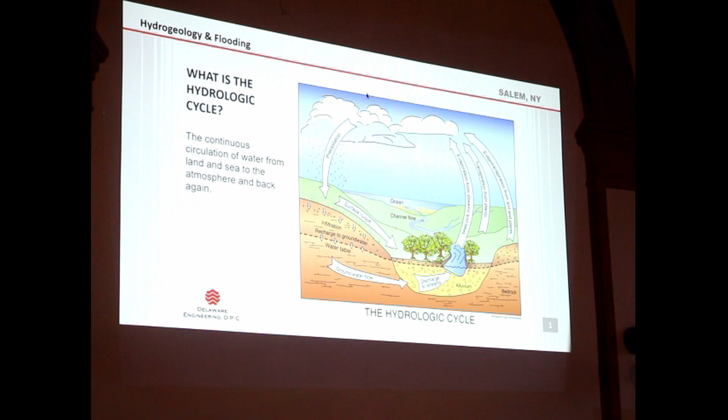So here's the hydrologic cycle. I'm going to check out the new, wow, that's really cool. So we can say that water starts up here in the clouds. It's not even going to talk about how it gets there. That's a whole other story.

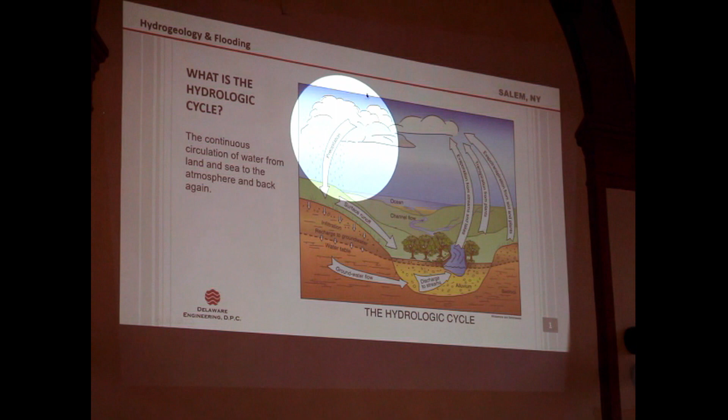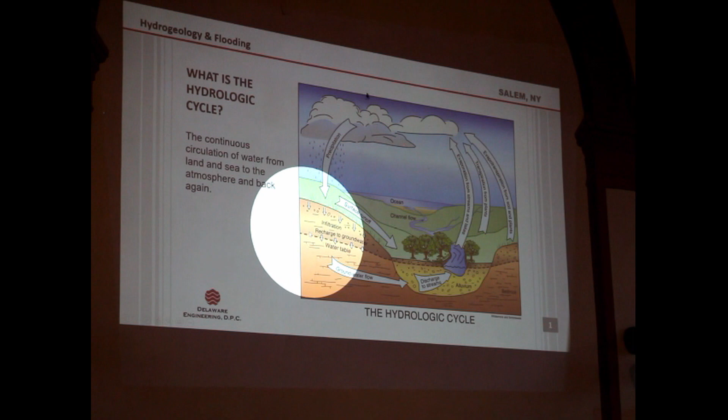Let's say we're starting from there, and water rains on the ground. When it gets to the ground, it has a whole bunch of options. Depending on the slope and what kind of surface that is, it can run over that surface, or it can infiltrate into the ground. If it infiltrates, it'll hit those areas of soil that are dry, and infiltrate through.

It might be bedrock, it might be soil, and eventually that water keeps going downhill, underground. It'll hit that area that's saturated, that we call the water table. And that water table level changes in every area depending on the weather, the climate, and what's been going on.

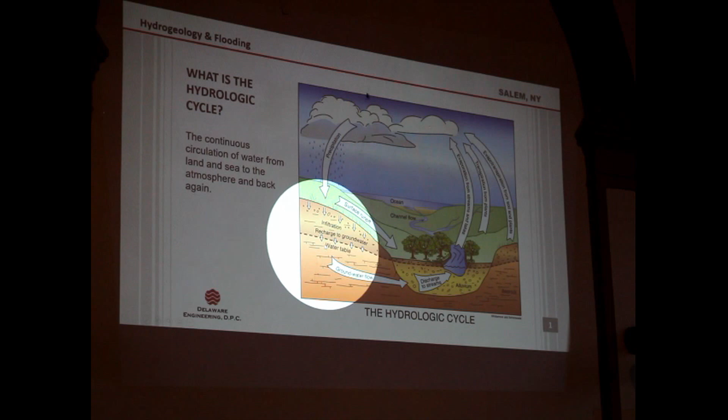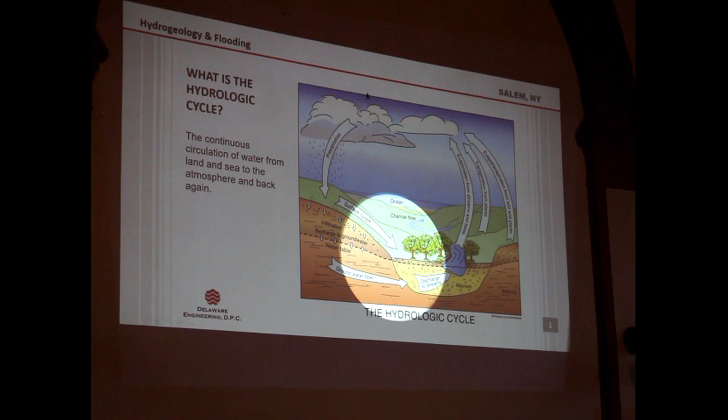Groundwater also flows downhill, and we're going to assume that this hill is a lot bigger than it is on the picture screen here. So that groundwater will flow downhill until it meets this area down here, where there's a channel of the river, or the stream, or the creek, or whatever you want to call it. That groundwater table intersects that creek bed, and groundwater will feed into that creek bed. Then the water continues to flow downhill as it goes.

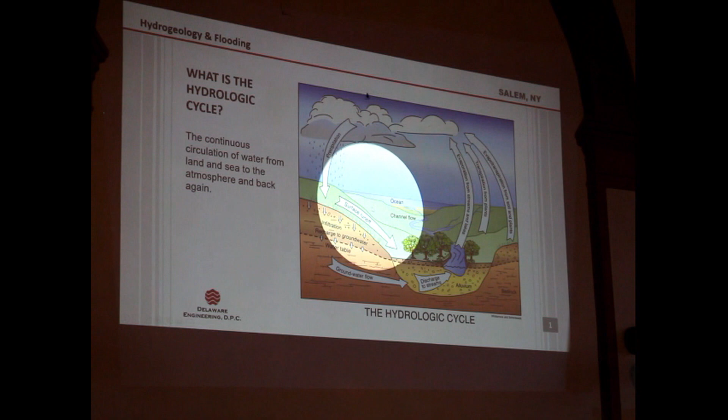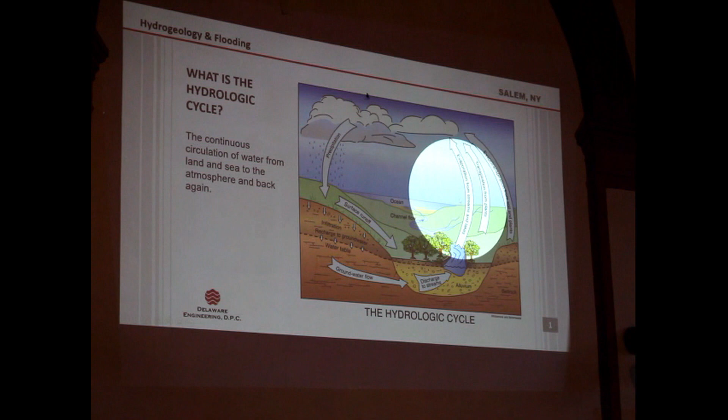Now, if that water hits the surface of the land, it depends on the soil, how fast it will infiltrate, if there's pavement, if there's bedrock, if there's a steeper grade, more of it will run off and directly downhill into the forested area, into the flatter area, until it also hits the stream, and the stream goes downhill to the ocean. Otherwise, trees can transpire the water that they pull up, vegetation can transpire the water that it pulls up, and it goes back into the atmosphere, or it winds its way all the way down into the ocean, where it also evaporates and heads up back here.

Now, people pull that water out for their drinking use and for other uses, and that, as part of a wastewater treatment plant or a septic field, also rejoins the cycle.

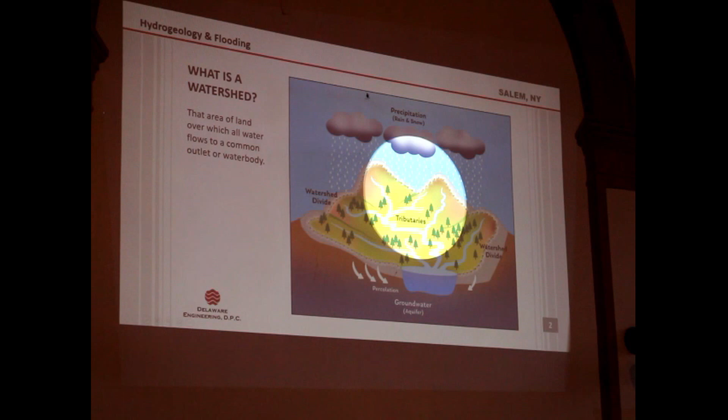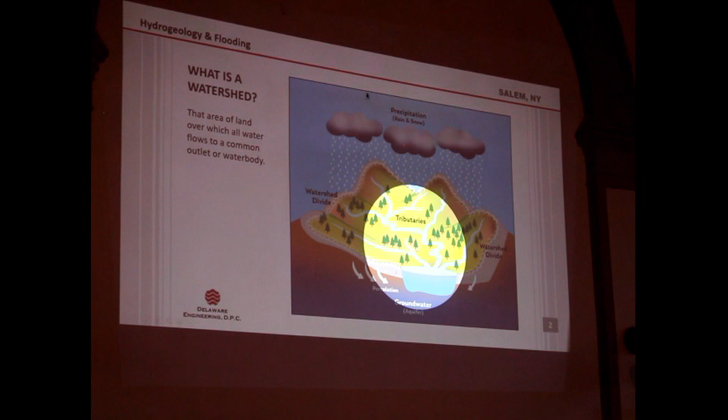All of this rain that's falling here is hitting that top peak of the mountain, and water on this side of the hill flows down this way, and water on this side of the peak flows down that way. All of that water that flows into these common tributaries that gather together and flow to that common point defines the watershed.

Watersheds can be talked about on large regional scales, like you have the Hudson River watershed, which comes all the way from here in upstate New York and farther up. The Mohawk River joins it, and it all flows down into the Atlantic Ocean in New York City. That could be talked about as one watershed. It's one land mass where all the water flows over it out to the common point in the Atlantic Ocean.

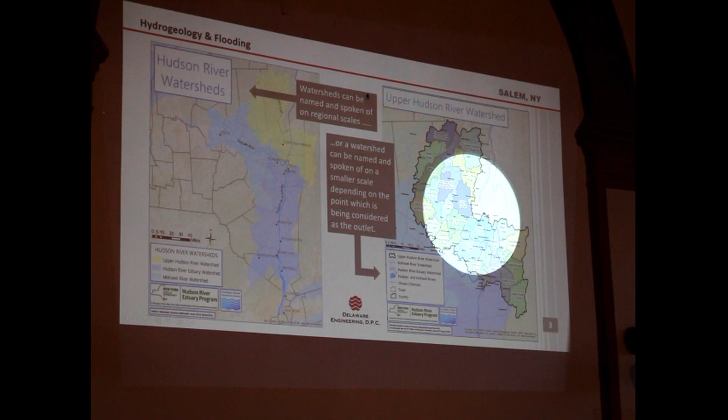But mostly we talk about smaller watersheds, and we break those up into sub-watersheds. Here we are over in Salem. This is the Upper Hudson River watershed, which is this yellow part up here, broken up into its tinier sub-watersheds. That just makes it easier to talk about when you break them up into smaller areas, but you can always talk about more than one sub-watershed as a larger watershed.

Okay, communities and water. Like we were talking earlier, people live near water - that's just where we put most of our communities. The geology, the soils, the land cover, it's all going to be part of determining how that water flows over the surface of the earth.

If you've got forest, the water is going to trickle through the trees, and some of that water gets transpired up back into the atmosphere. It makes it down to the soil. The tree roots keep the soil in place, the water infiltrates. It takes a long time to do that.

If you have buildings and pavement in a city, that water falling as rain can't infiltrate into the ground. The pavement's harder, so most of it flows fast off of that hard surface into the nearest waterways. Those kinds of things can change the amount of flooding we see. If you have things in a human environment, or bedrock in a natural environment, that impede the way rainwater infiltrates into the ground, you can increase the runoff, which will increase the amount the stream carries, and increase your flooding.

So natural floodplains, we're going to try to talk a little bit about two different pieces of vocabulary systems here. What I've been talking about is the natural systems.

The natural floodplain is that area that's expected to flood, that stream bed. Okay, so this stream has water. The stream bed is here. The bank is this area on the side.

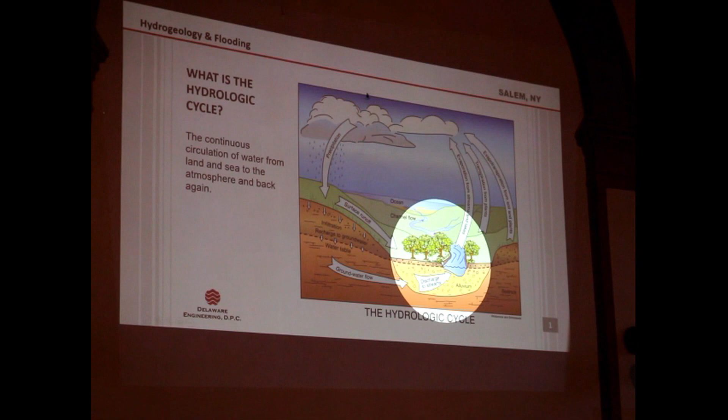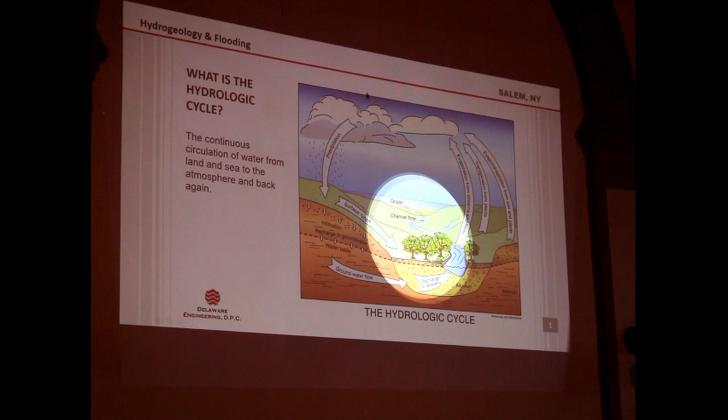When that stream gets full of floodwater after a storm, after snow melts, the water will go over that bank and spread out into this area, the floodplain, that flatter area on the side of the river the river can access. The size of that floodplain depends on how much flow there is, what material is in that river, is it sand, is it rock, and what's the slope of that plain around the stream. It's all locally specific.

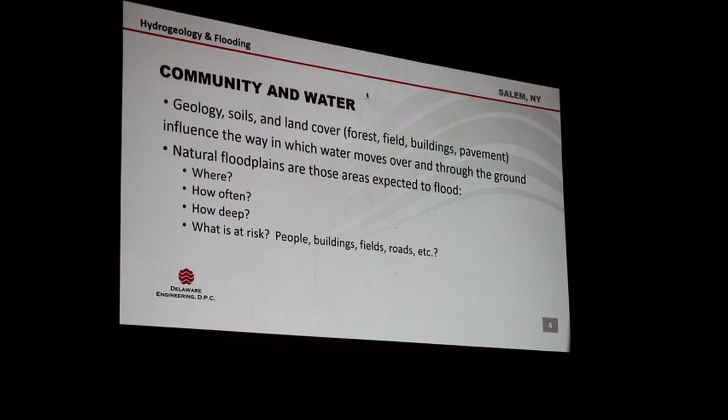So natural floodplains are just those areas that are expected to flood. We love water, we know too much of it is powerful. It can affect the landscape, it can affect the things that we build too close to the streams. So we're really interested in knowing where it's expected to flood, how often, how deep, how fast, how powerful is that going to be, and what does that mean about our risk.

And that's when we get into some of the regulatory bit. Oh, not yet, sorry.

Sources of flooding are often different depending on where you live. The ocean causes storm surge floods that affect communities there. Rivers and streams - you've seen rain. You can have a smaller rainstorm that just trickles down and gathers into the ground. Or you can have a hurricane or a larger storm that puts down more water than the soil can take in, and that moisture flows off into the rivers, and they flow faster.

You can even have conditions where the ground is frozen in the winter, maybe in February or March, where the weather's starting to get warmer, the snow starts to melt - you have a rain on snow event, but the ground is frozen and can't accept the water into it, so it floods, runs off the surface of the ground, hits that stream bank, and goes a lot faster. All of these things can happen in a flood.

So now here's the regulatory part. A floodplain is that part that can flood, no matter where it is. FEMA, the Federal Emergency Management Agency, back in the early 80s, started setting up a national flood insurance program because there were lots of major floods and storms and dam breaks and things in which people and property were being injured, and they needed to make some sort of insurance program for that.

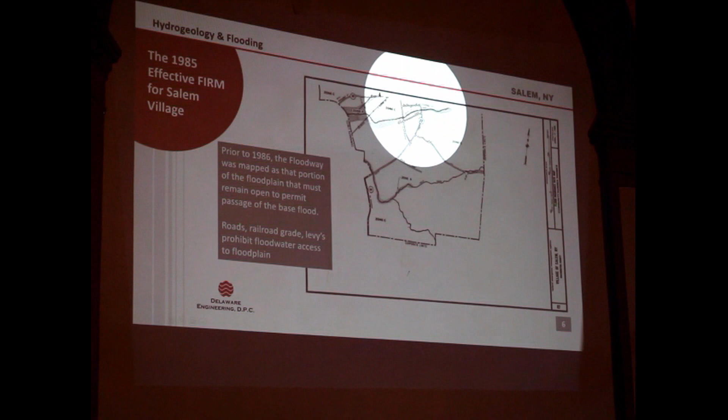So here you can see, it's kind of hard to show up there. This is White Creek, and this is what's called a Zone A. This gray area is the area that is going to be flooded by the 1% chance annual flood, the one FEMA and the National Flood Insurance Program are interested in making regulations to protect to that level.

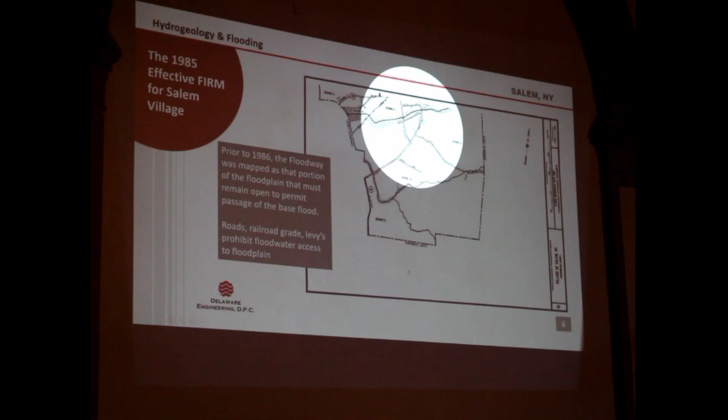There is no base flood elevation here. The studies done on this map in the early 80s for this area did not establish the base flood elevation. So if White Creek floods at a 1% chance annual storm, how high is that water going to come above mean sea level? You don't have that information here on this old map. They're kind of difficult to work with. They're only paper.

If you wanted to see where your property was and determine if it was in the FEMA floodplain, this is a little hard to work with. It also shows some areas where there might be railroads and things crossing, but it's not really detailed.

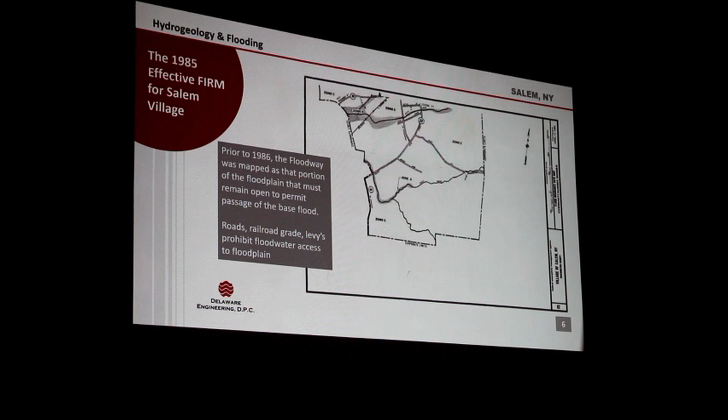Anyway, so some of you might have gone to the risk map update project meetings. Did anybody go to any of that? Good, yeah. What did I do? Where did you do that? Yeah. There we go.

This is the draft study of the White Creek watershed that's being worked with now. This was presented in November of 2019. FEMA is updating the flood risk maps for the four counties in this area. Lots of places around the nation are being updated. You can't really use the data from the 1985 map anymore, it's old. Things change, there are developments on the ground. The statistical data about how water flows through White Creek is going to be different now because there are more roads, more railroad beds, more bridges, things that change how the water moves across that floodplain. So these are going to be updated.

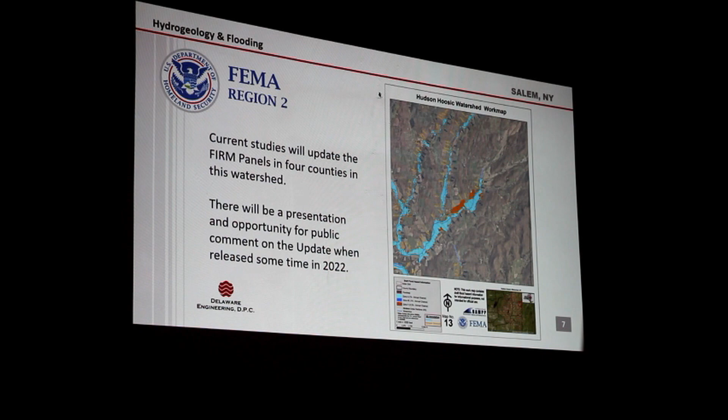The next step I've heard is that there will be an update released into the community. I don't know how they advertise those. If you're already linked up, that's great. If I hear anything ahead of time, I'll let you know. But yeah, you should pay attention to this coming up. It will be released for public comment in 2022, is what I heard. And I believe that's it.

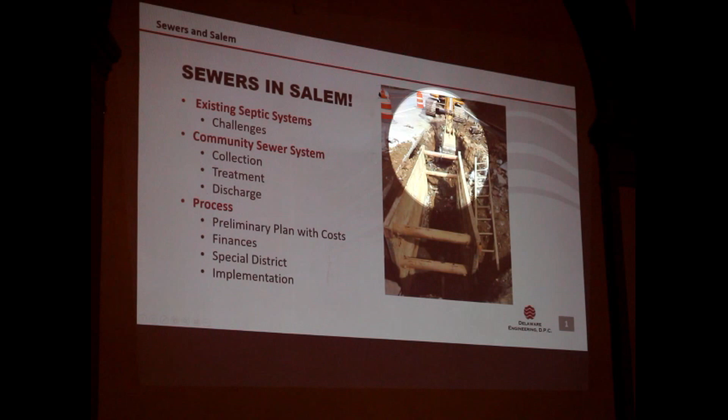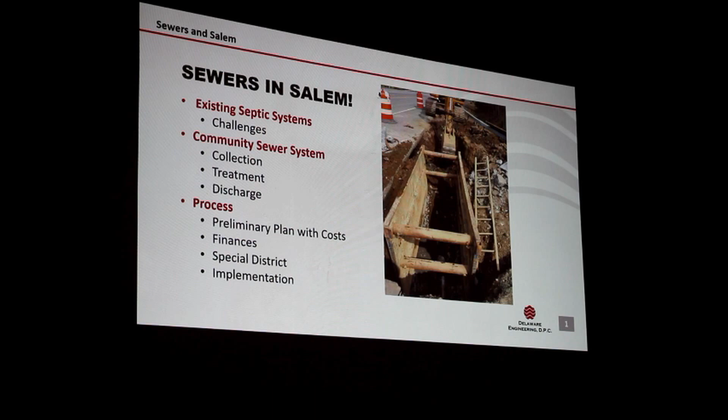This is an excavator that is creating a trench, and that, my friends, is a sewer pipe. That is a gravity sewer. This picture was taken in the town of Wyndham, probably about 10 years ago at this point. Our construction guys take great pictures of things like pipes, but not a lot of pictures that can actually show people what they look like. But this is kind of what constructing a sewer system can look like, just so everybody has an idea.

So, septic systems. Everyone here, if you own a property, you have some kind of on-site treatment system. We kind of pejoratively call them septic systems. We know that this is a very old community, so we suspect that a number of the septic systems aren't what we would consider modern engineered systems, because they probably predate modern engineering.

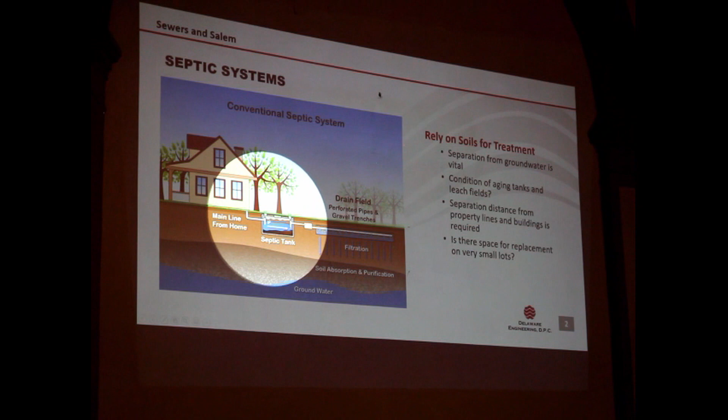But if they were, this is more or less what a septic system looks like. We have our house, which all the plumbing goes to some point, usually in the basement. There's a wall penetration, it comes out to a septic tank. And the septic tank, this one's got a manhole and a couple of little ports on it, which is kind of a swank, fancy new septic tank. A lot of them don't have that. Usually there's a baffle wall someplace in here.

As the water enters, solids are going to accumulate on one side of the baffle wall. The water fills up and comes over the top and out the pipe that's set at an elevation out to this little structure, called a distribution box, out to a leach field. There will be a network of pipes that I describe to people as looking like the tines of a fork. They all come together in one spot, and when they come out, they are generally perforated pipes, constructed in some kind of media, usually little rocks.

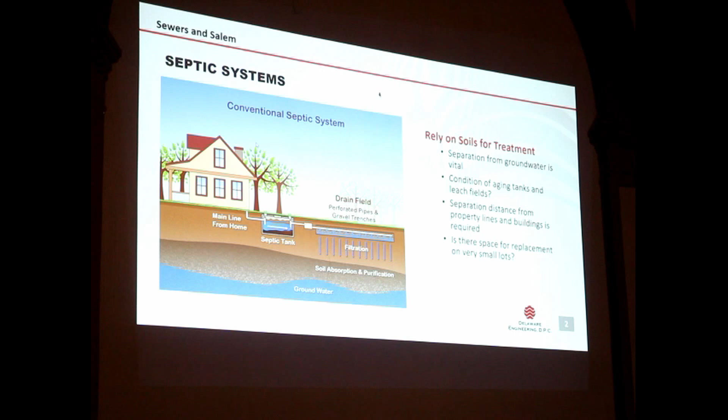The bottom of the septic system relies on this natural soil horizon to filter the wastewater as it travels through. Septic systems, you might not think about this since they're underneath the ground, but they are aerobic. There's bacteria in there, consuming oxygen, consuming the organic matter that's in the wastewater, as it travels through the septic system and through the soil underneath it, before it hits the groundwater.

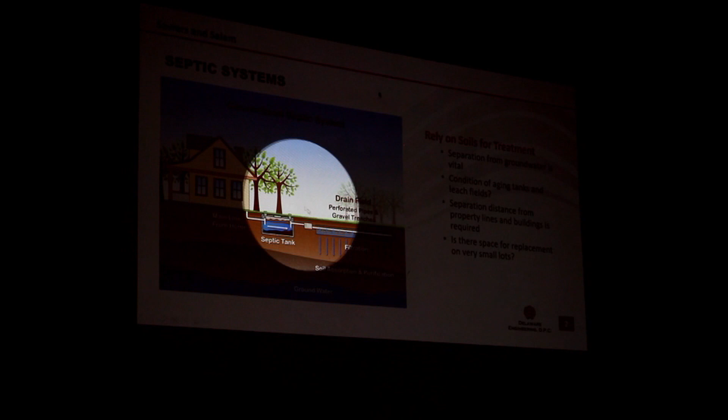Now, this picture - I'm not a huge fan of it because it makes groundwater look like some kind of underground lake. And it's not. One of the things Tracy said earlier that's really important to understand about groundwater is it's simply the saturated zone of soils down below us. So the groundwater table is going to be different depending on your geology - just the natural makeup of what's here.

One of the slides Tracy had in here that we decided was maybe a little too far was about glaciation. This area was subject to glaciation, so that geology is a result of the glaciers being here. The groundwater table is a result of that, but it also fluctuates and changes. It's going to be higher at some points in the year, like now, because we've had snow melt and usually rainy springs. Then when you get all the way to, say, August, the groundwater table may be a little bit lower.

So one question I've heard some folks ask is, White Creek at times in some locations appears to be dry - where did the water go? Remember, Tracy had that picture showing the groundwater level, that saturated soil level, actually intersects the creek. It is the base flow of the creek. We just said that in the late summer and fall, the groundwater level is lower. So it's still there - you're just not seeing it intersect the bottom of the creek.

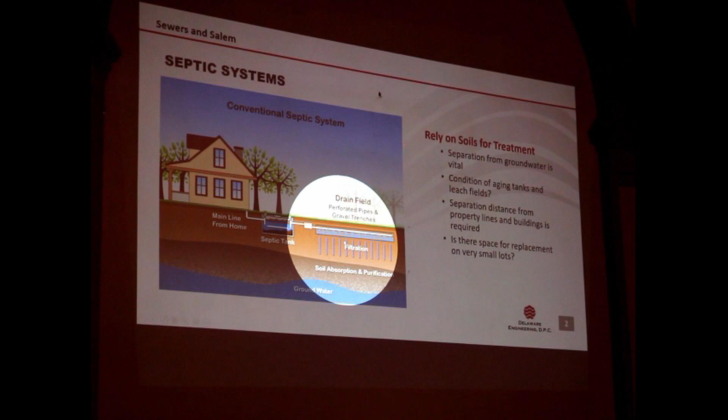And then the other thing we're relying on is this zone of treatment right here, which either relies on natural material or it could be fill. You can bring in fill. But we're assuming that zone of treatment still has the capacity to treat the wastewater being applied to it. After some period of time, these beds can need to be refreshed, they need to be rested. And if you have one at your house that's been used for 80 years, that could be an issue.

And then the last thing we should talk about is this groundwater down here at the bottom. When that water table is high, which happens in the spring under flooding conditions, that treatment zone is flooded, so you're losing that value of treatment. So this is where septic systems in certain locations can be a challenge to creating really clean water and to really protecting the environment.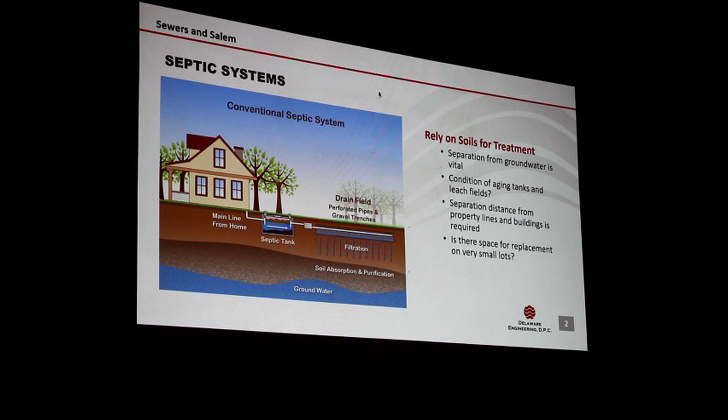So, community sewer system, what's the difference? No septics, right? Septic tanks are gone, leach fields are gone.

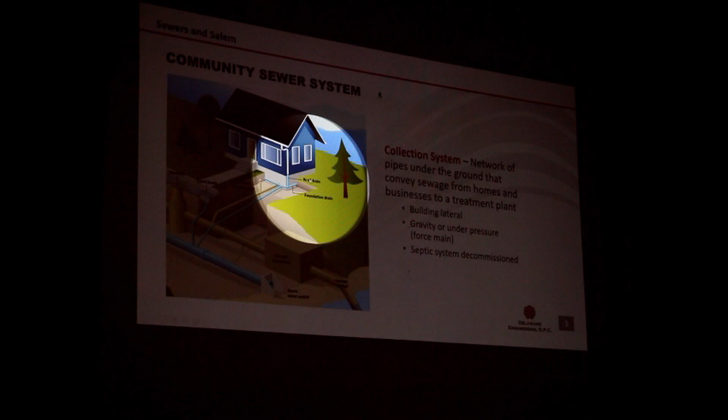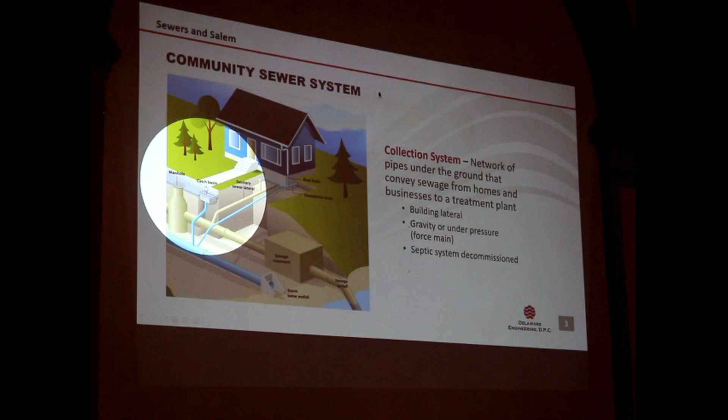In this case, we have a nice little house here. This one's kind of cool because it shows a roof leader, so there's a gutter running along the roof, and the roof leader comes down. It's also picking up a foundation drain here, and it goes into a storm sewer. You can see there's a catch basin up on the street going into a storm sewer. One thing we don't want to do is go in and mix stormwater.

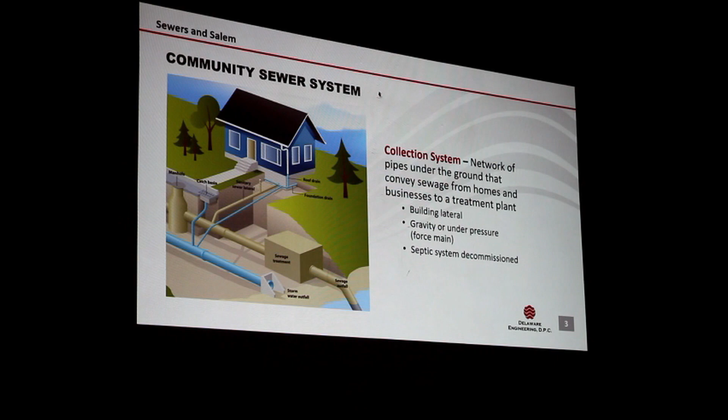We're going to hold questions until the very end. They're texting me saying you need to tip the computer because all they see is the railing. Say that again? Tip the... here, hold it back. The other way. The other way. Here. Oh, can't go? All right, with it. How's that? Better? I don't know. I'll ask about it, see if they can make it. Okay, sorry about that, thank you. Oh, that little thing will go away. You got it? Thanks, good.

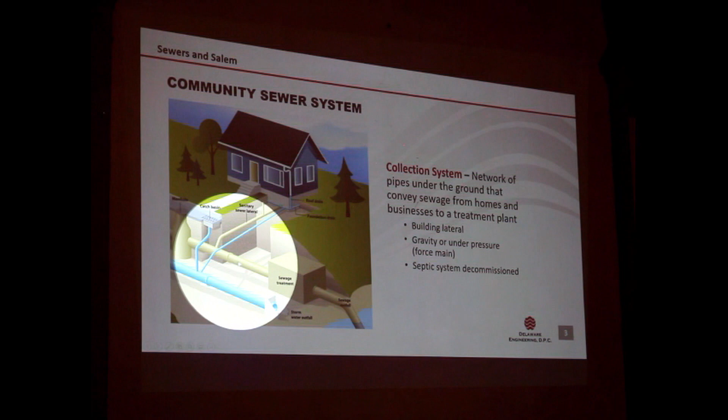So with this one, we want to keep our stormwater separate from our sanitary. It's good practice, and it's certainly required now, more than in past days, to get all the water away. This shows that sewage is all being collected in the house, coming to a pipe called a lateral. It comes out and connects into a sewer main, underneath the ground, that very first image I showed, going to a sewer plant and then out to the stream. We'll talk about that in a sec.

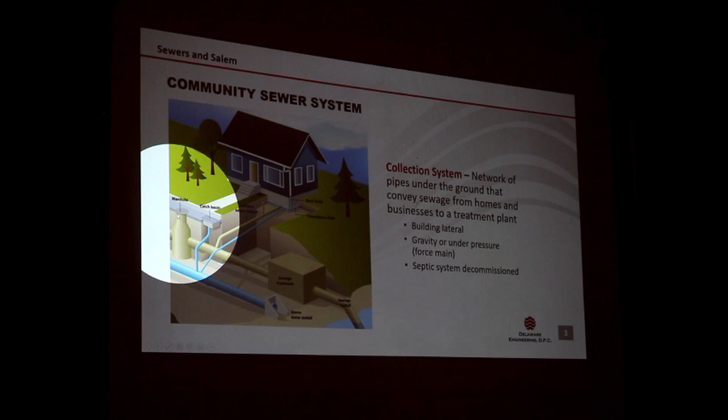And this is a manhole that you would traditionally see out in the gravity sewer system. So those are kind of the big picture elements.

Now there's a bunch of different ways to do this. Sewer systems can be done with pressure. So if you're not able to work with the gravity that God gave you, you can actually put in pump stations and force the water to go uphill. There's cost associated with doing that. Sometimes it's unavoidable, but generally speaking, try to work with gravity because it's there, it happens all the time—power's out, it still happens, those kinds of things.

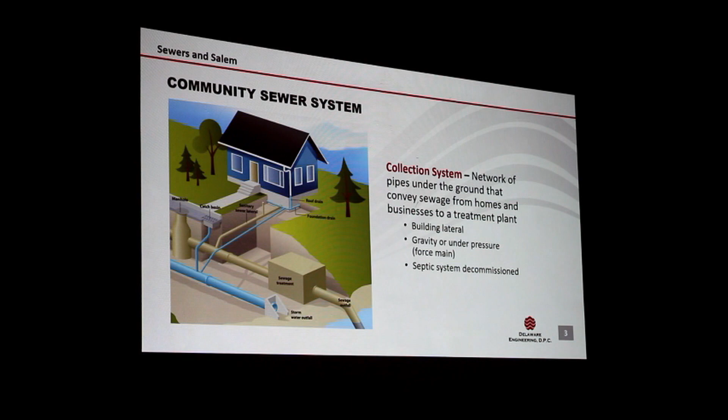These are the basic elements of a sewer system, a community sewer system, and wastewater treatment. Here's a picture of the White Creek. I didn't take this picture, I swiped it from a friend who did, but this is the White Creek.

There have been a lot of questions about treating this wastewater and putting it into the White Creek, which is a really valuable resource to the community. How do we make sure we're protecting it? There's also been discussion about what happens when there's no water in the creek because the groundwater table is so low. Can you still discharge treated wastewater then? And what happens when it's flooding? How do we make sure the discharge from the treatment plant isn't exacerbating flooding or making conditions worse?

The White Creek in this area is considered a Class C, capital T water body. You might ask, well, who's been out there classifying water bodies? The state has. The State of New York, and actually the federal government too, classify water bodies based on highest and best use.

They go from drinking water sources, which are AAA, AA, and A. Those are some of our more pristine lakes and reservoirs, and there are a number of them here in the state, considered drinking water sources. That doesn't mean you should scoop out some water and drink it—there are still viruses and things that can make you sick—but they're considered waters of the highest and best use as a drinking water source.

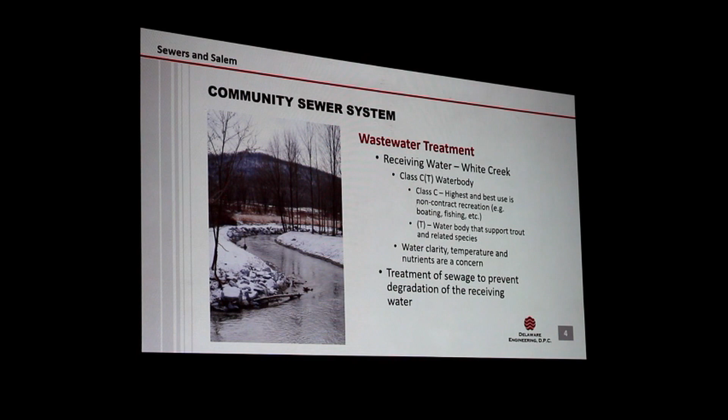So what do wastewater treatment plants look like? I think a lot of us picture industrial style facilities, maybe some tanks and things outside. They can look like that. Some of them do, but a lot of them also look like this building right here.

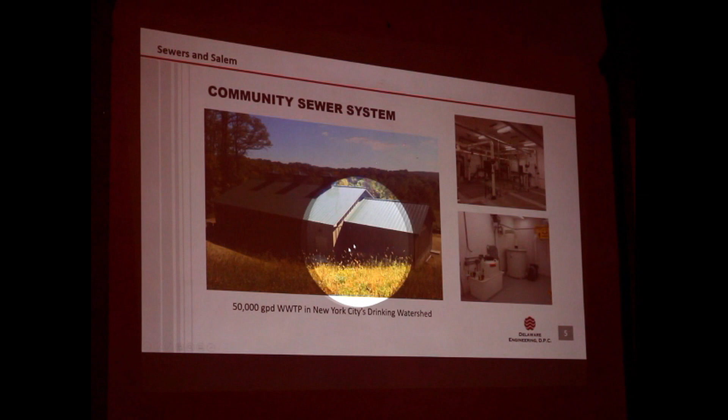This is a 50,000 gallon a day wastewater treatment plant in New York City's drinking watershed. It sits in the middle of a multi-million-dollar housing development, and we had to put a sign on it that says 'Not the tennis club,' because people kept coming in wanting to know if this was where they signed up for tennis. As a result, you can tell it doesn't smell and doesn't make noise, because if it did, they wouldn't be coming here asking to play tennis.

This wastewater treatment plant here in Salem, we've done some planning. We're looking at somewhere in this range, maybe 50,000 to 75,000 gallons a day if we consider some growth. It's hard to tell how big the building is, but it's not enormous, and it's also not particularly ugly. It's kind of an innocuous building, built in 2014.

That particular facility does not discharge to a stream. Instead, there's a very large irrigation system it discharges to, sending treated water, basically drinking water, sewage turned into drinking water, directly to the groundwater table. That was a requirement because it's in New York City's drinking watershed. So that's an interesting project.

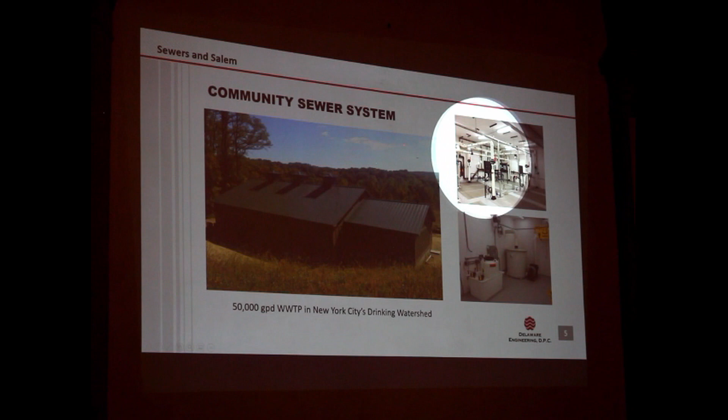The pictures up here, this is inside the building. Underneath here there's grating, and underneath that is a series of equipment, and this is just piping moving water from point A to point B. Down at the bottom here are different chemicals and components. I wanted to show you this because it's easy to conceptualize wastewater treatment plants as industrial, dirty, ugly, smelly, noisy, terrible things. They don't have to be, and a lot of them aren't.

This wastewater treatment plant, when you walk inside, you feel like you're in a laboratory. That's the sensation you get. A lot of them are designed this way now, as modern systems.

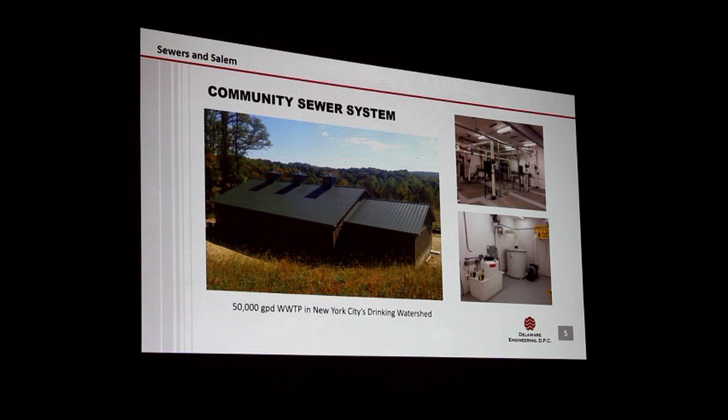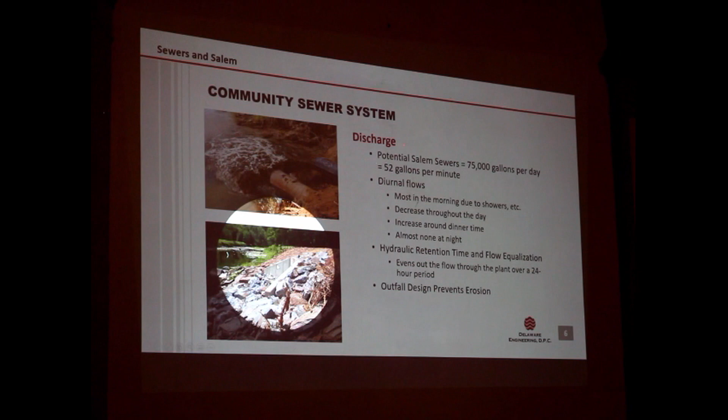Instead, what we have is down here on the bottom. This structure is a concrete head wall. Unfortunately I couldn't get much further down, I took this picture during construction because otherwise I'd have been in the water. Inside that concrete head wall is the pipe that is the discharge from the treatment plant. The other thing you see is all this rock here, that's intentional, it's riprap, and it's there for a couple of reasons.

This picture was taken in relative dry conditions, in October, when this work was done, probably ten years ago now. I wanted to get a picture of this today because it's all grown in, green, and really pretty, and you can't even see the head wall anymore, but I couldn't get down there because it's so grown in.

This is intentional, because the rocks allow the water to spread out. It gets aerated and there's no erosion, it's not coming out in a chute like in that other picture. This is a more typical design for an outfall, and this design is also under consideration. This is a trout stream, actually a spawning stream, the Schoharie Creek. So it's designed for a variety of different purposes.

Now, what do we do about that whole idea of, okay, the river is flooded, where does the water go? Well, the water still goes into the river.

The way treatment plants work is, if you think about it, when you're at your house and you get up in the morning, you take showers, have breakfast, whatever, you use a lot of water. Then, even if you're home, probably from the period after that until lunchtime, you don't use all that much water. Lunchtime, you might use a little more. Afternoon, you probably won't use a lot. In the evening, dinner time, you use some more. At nighttime, you have to do nothing.

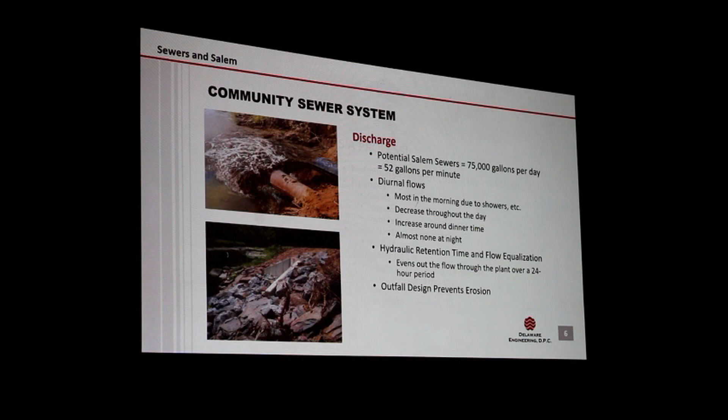So the outfall design prevents erosion.

So my last point, and then I'm going to turn it over to Candace, is that developing a community sewer system is a process. I know the engineering report was prepared a while ago. We looked at that, and there are some changes we need to make just to catch it up to modern time. One thing that's unfortunate is costs are escalating rapidly, on the order of about 15% since 2018, which is unfortunate because that's a lot of money. We do see some bids coming back now that seem to indicate things are leveling out a bit, which would be good for stability in construction markets. But a big part of this, the engineering side, the pipes and the treatment plant, getting the permits and making sure the creek is protected, that's all important and absolutely needs to be done.

But really what has to happen is the community has to decide this is something it wants to do. And if not this, then what are you going to do to protect your community, to encourage the investment you need to continue the quality of life that you have? You need a sort of plan B. And more importantly, if this is something the community decides it wants to do, you have to figure out how you're going to pay for it. It's really unfortunate, but the way it works here in New York State is there's no one to pay for this except the users. The folks who are benefited by the system pay for it.

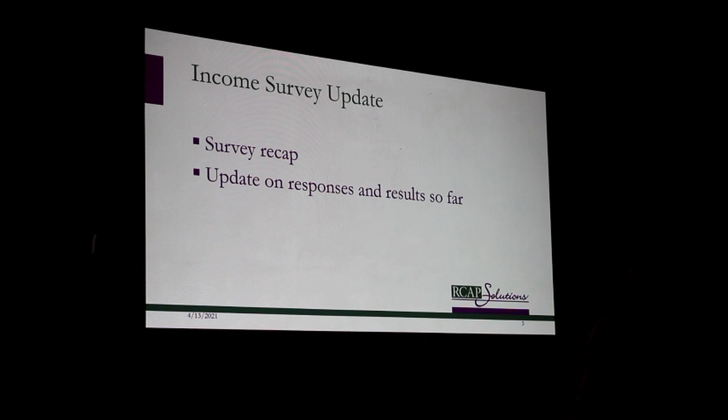So I was brought in by Mary Beth to help with the income survey. As Mary Beth pointed out, the purpose of the income survey is to help you document your eligibility for funding. So I wanted to give a quick recap of the survey and then tell you where we're at in terms of survey responses received so far, what the results are, and what else needs to be done to button this up, because there's still a bit of work to be done.

So why do the survey? Well, the town is obviously looking for additional funding to help keep the cost of this proposed project down. And to do that, they need to document that they're eligible for these funding programs. Several of the biggest infrastructure funding organizations require income surveys to prove that the community is eligible for this assistance.

So who are we surveying? We're surveying all the residential households in the proposed area. The district, that's the boundaries of the proposed area, so it's not everybody in the town of Salem, just this proposed district. And it's only residential units, not houses necessarily. So that would be an apartment, either side of a duplex, a single family home, whatever. Each of those is a household, a distinct household.

I had some people write back and say, well, why isn't the sewer system benefiting the commercial people? It's definitely benefiting the commercial people. Those boundaries are drawn to serve a physical area and everything that's in there. But for purposes of an income survey, we're documenting the income, the collective income of the residents of this area.